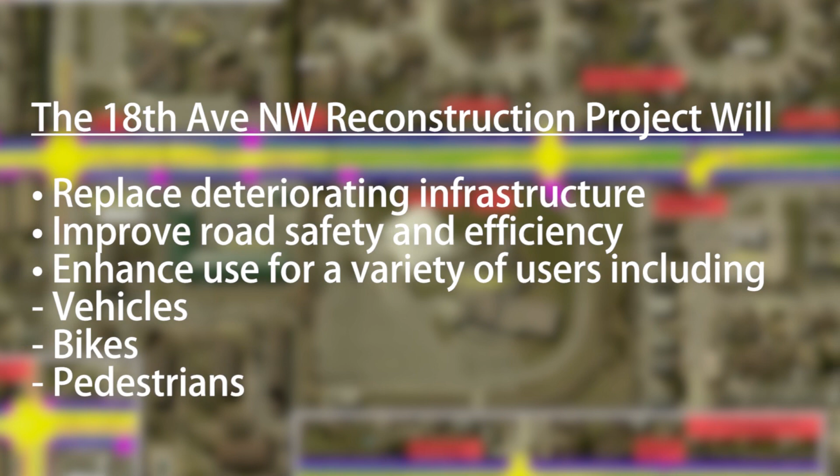What exactly will be done? The City of Rochester and Olmsted County have partnered and secured federal transportation funding to pay for a portion of the project. The proposed project will reconstruct 18th Avenue Northwest from 37th Street Northwest to 55th Street Northwest.

The project is expected to begin with utility work in the spring of 2017, continue with major construction in August of 2017, and conclude late in the fall of 2018.

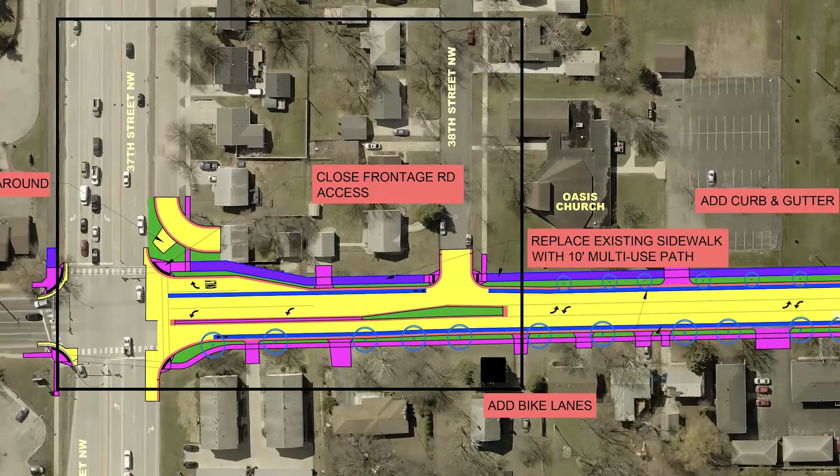Between 37th Street Northwest and 41st Street Northwest, the roadway will be reconstructed as a 3-lane roadway with a center left turn lane, on-road bike lanes, and a sidewalk on the east side, and a multi-use path on the west side. Between 37th Street Northwest and 38th Street Northwest, a center median will be added to help define the left turn lane, which will help address the current rear-end crash issue.

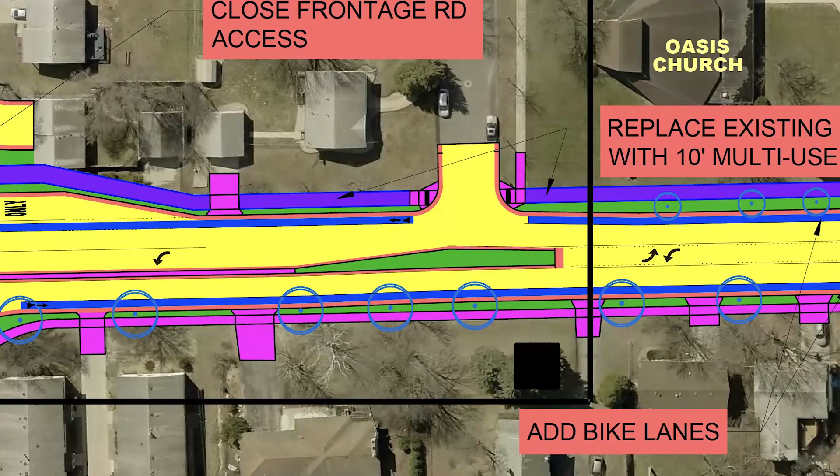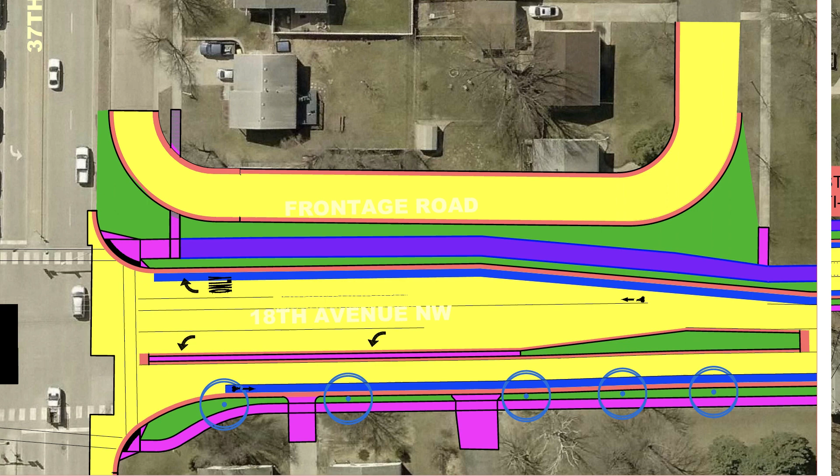Access to 38th Street Northwest will be limited to right-in, right-out access with no left turns allowed. The current 37th Street Northwest frontage road access to 18th Avenue Northwest will be replaced with a 3-point turnaround area. Future improvements may include the extension of the frontage road to connect with 38th Street Northwest and the elimination of the 38th Street Northwest intersection with 18th Avenue Northwest. In addition, pedestrian curb ramp and signal improvements will be made at the 37th Street Northwest intersection.

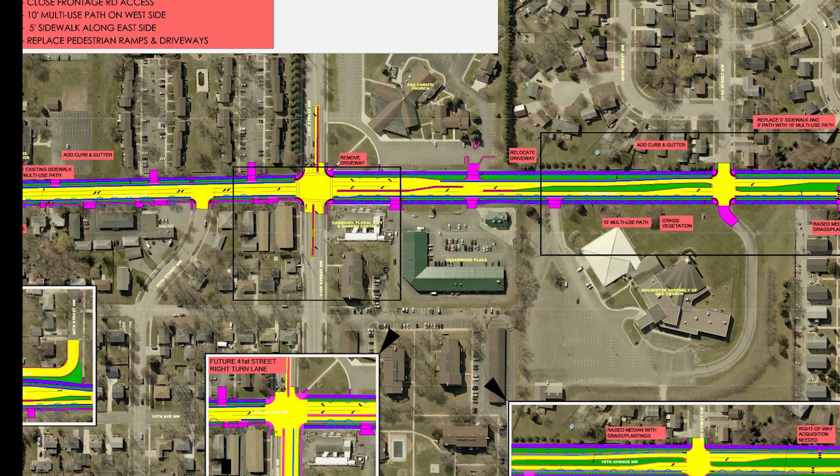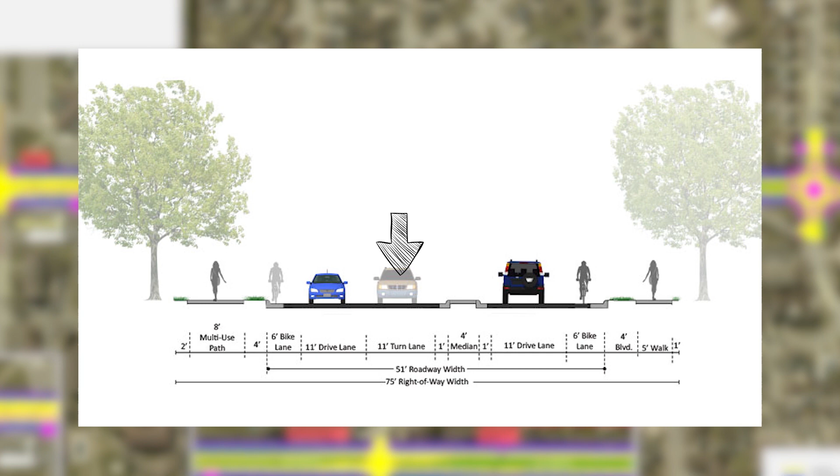Between 41st Street Northwest and 55th Street Northwest, ditches will be removed and the roadway will be reconstructed into a 2-lane urban roadway with curb and gutter, landscaped center medians, left turn lanes, on-road bike lanes, and multi-use paths on both sides of the roadway.

At 41st Street Northwest, center medians will be added to better define the left turn lanes. Signal and pedestrian curb ramp improvements will also be added. Changes to 18th Avenue access will be made at the Cedarwood Plaza and Pax Christi Church.

The South 18th Avenue entrance to Pax Christi will be eliminated, and the South Cedarwood Plaza entrance will be limited to right-in, right-out only by the center median. The north entrance to Pax Christi will be relocated to better align with the Cedarwood Plaza access across the street. This north access will allow all turning movements with left turn lanes provided.

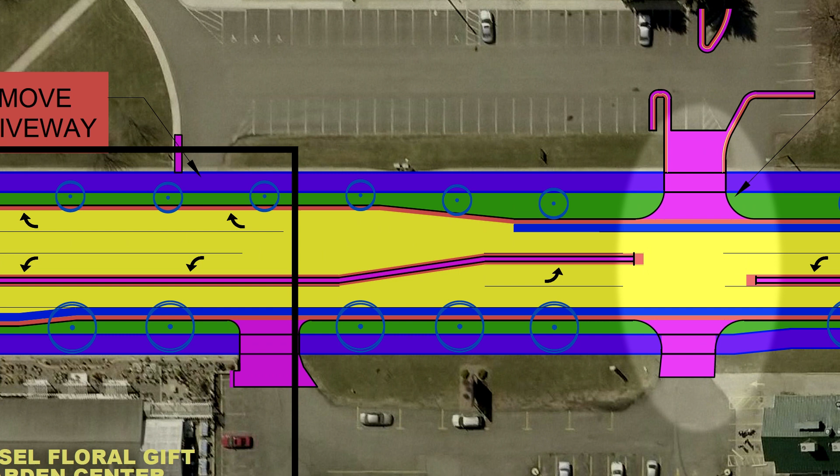The intersection at 43rd Street Northwest will be constructed as a full-access intersection with left turn lanes. At 45th Street Northwest, left turns will be allowed only for southbound traffic.

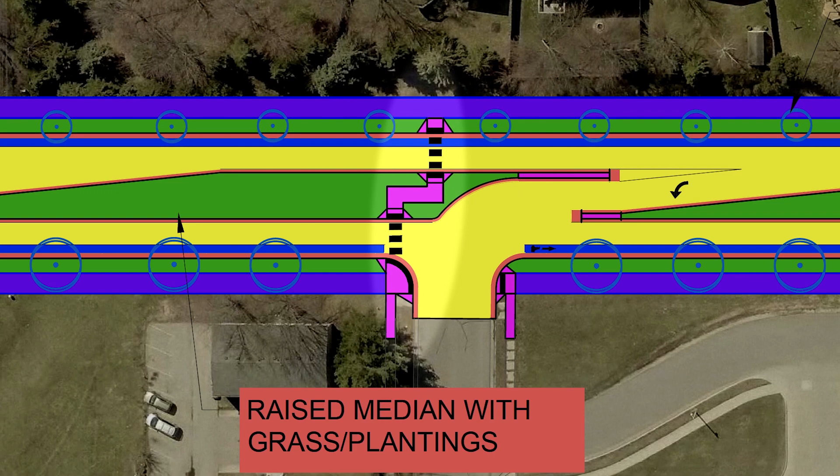In addition, an enhanced pedestrian crossing will be added, including a center median acting as a pedestrian refuge. The sidewalk in the center median includes a jog to allow pedestrians a better view of oncoming traffic prior to crossing. A future improvement to the 43rd and 45th Street Northwest intersections may include closure of the 45th Street Northwest intersection and extension of Service Drive to the south to connect with 43rd Street Northwest.

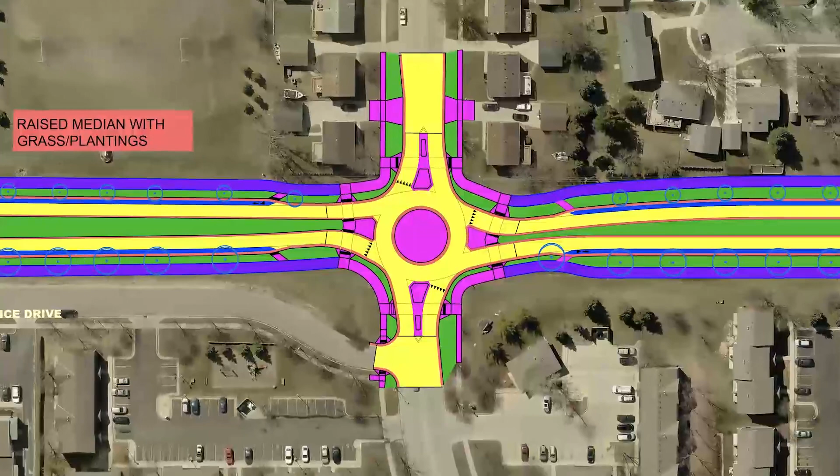At 48th Street Northwest, a mini roundabout will be added. Mini roundabouts allow full access to all turning movements while providing added safety benefits, including reduced speeds and shallow entry angles that reduce crash severity. These benefits result in reduced crash rates at mini roundabout intersections when compared to other intersection control types.

Later in this video, we will learn how mini roundabouts function and how they are different than larger roundabouts that have been constructed elsewhere in Rochester.

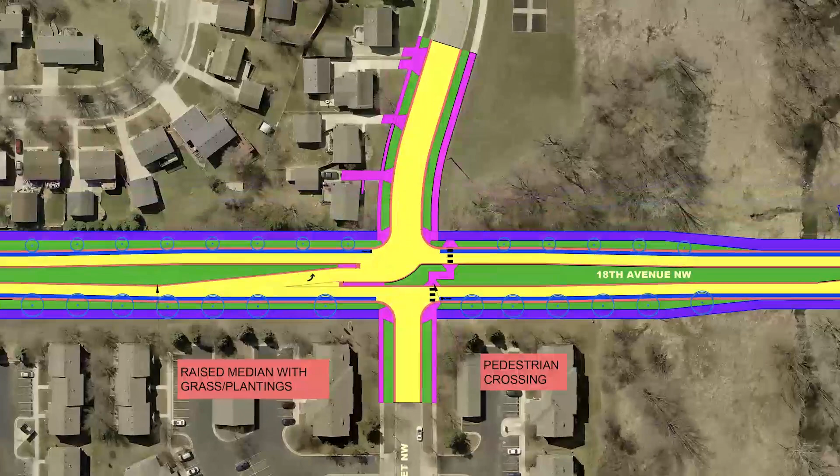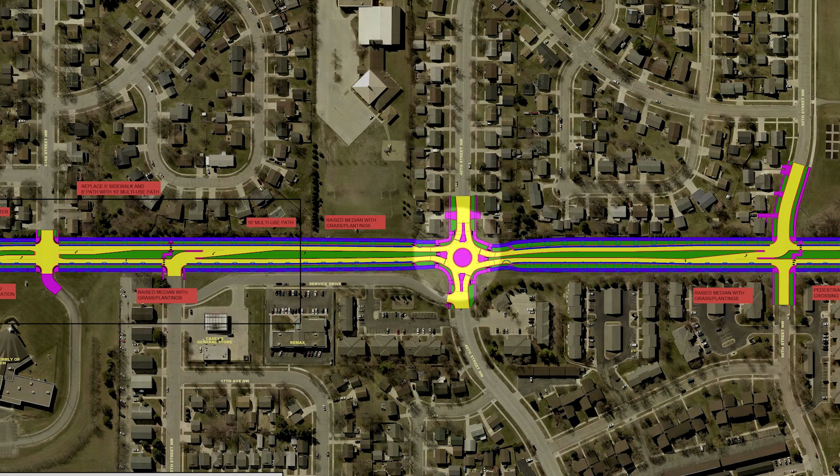At 50th Street Northwest, left turns will be allowed only for northbound traffic. This intersection will also include an enhanced pedestrian crossing similar to the 45th Street Northwest intersection. With combined improvements of the 43rd, 45th, 48th, and 50th Street intersections, there will be full access to neighborhoods along 18th Avenue. The mini roundabout at 48th Street Northwest will serve as the primary crossing of 18th Avenue Northwest. Northbound travelers along 18th Avenue will be able to turn east at 45th, 48th, and 50th Street Northwest, and west at 43rd, 48th, and 50th Street Northwest.

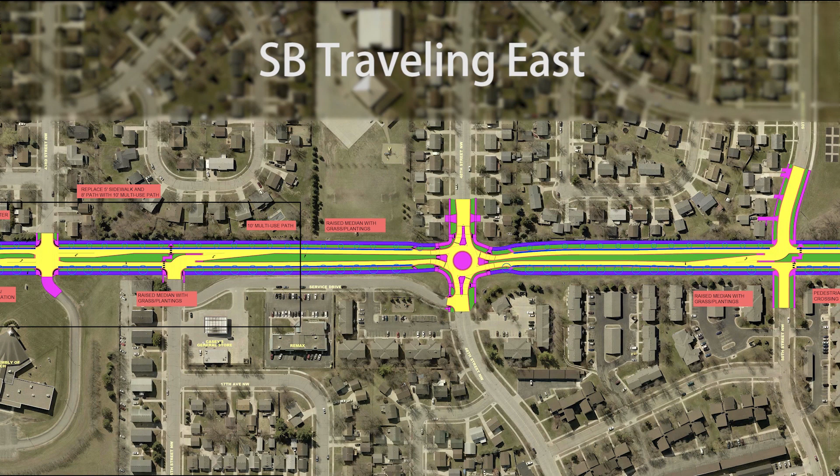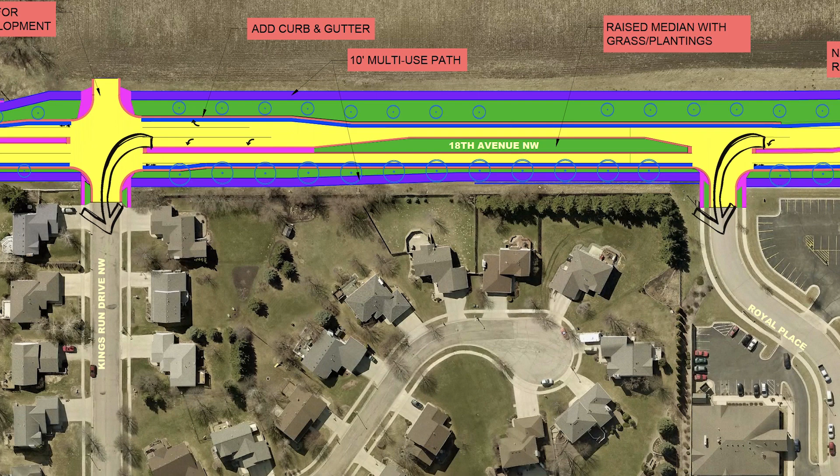Southbound travelers will be able to turn east at 48th and at 45th Street Northwest, and west at 50th, 48th, and 43rd Street Northwest. The Kings Run Drive and Royal Place intersections will be constructed as full-access intersections with left turn lanes and a right turn lane at Kings Run for future development.

Pedestrian ramps and signal improvements will be made at 55th Street Northwest.

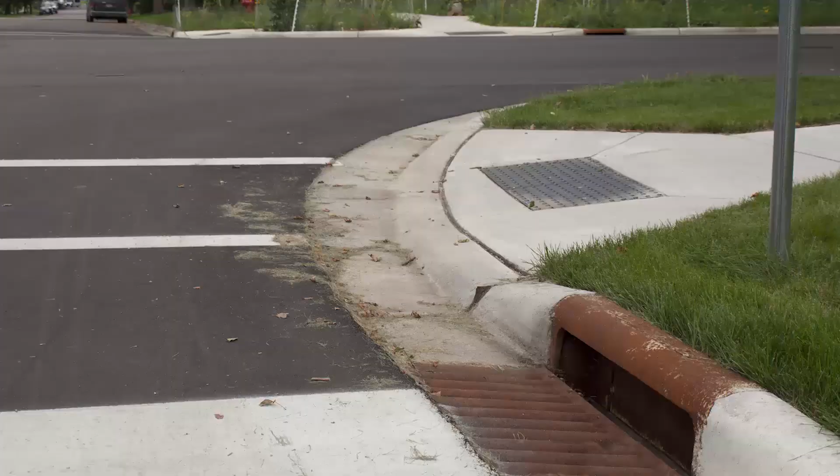Grass boulevards and multi-use trails will replace the drainage ditches along the roadway. Catch basins and storm sewers will catch runoff. Rain gardens at selected locations will provide stormwater treatment. Other landscaping, including median plantings and boulevard trees, will also be installed along the corridor.

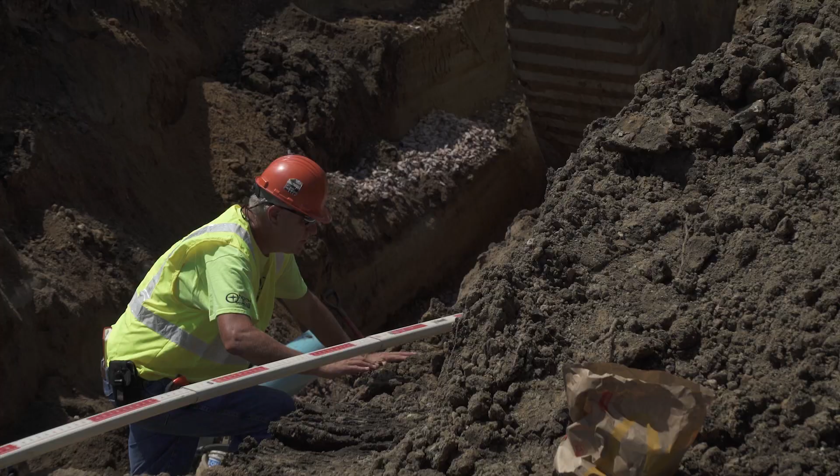Along the entire corridor, selected replacement of sanitary sewer and water main utilities will be made. In addition, relocation and replacement of other utilities will be completed both prior to and during the project. These relocations will include power poles, street lighting, natural gas, and communication lines.

How will it affect me? Utility relocations for the project are expected to begin in the spring of 2017, with major construction planned to begin in August of 2017. The project is expected to take place over two construction seasons, completed and open to traffic in late fall of 2018. The project will be constructed in four phases.

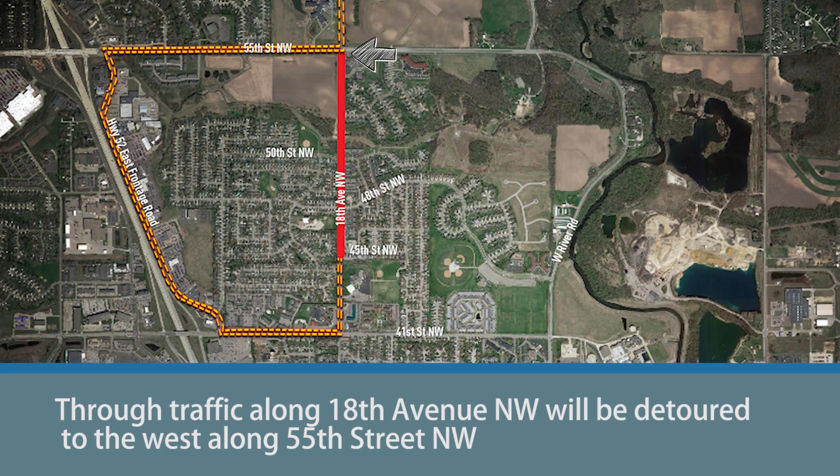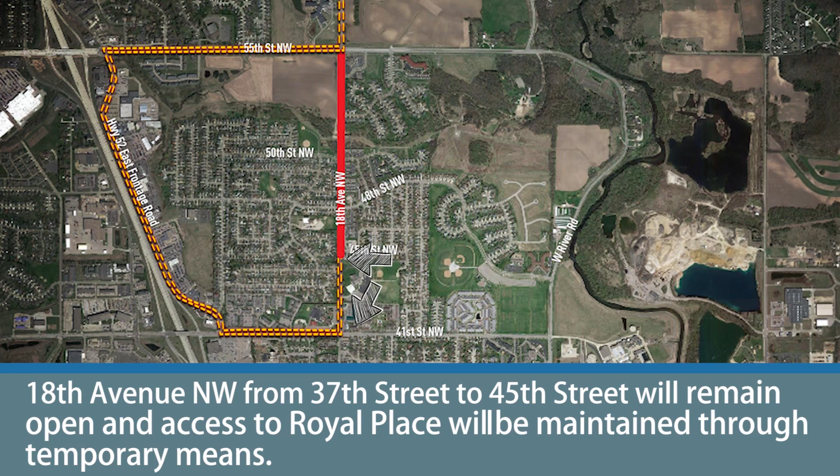Phase 1 includes 55th Street Northwest to the north side of the 45th Street Northwest intersection. During Phase 1, through traffic along 18th Avenue Northwest will be detoured to the west along 55th Street Northwest and 41st Street Northwest to the Highway 52 East frontage road. 18th Avenue Northwest from 37th Street to 45th Street will remain open, and access to Royal Place will be maintained through temporary means. Access to Kings Run Drive will only be available from 55th Street Northwest.

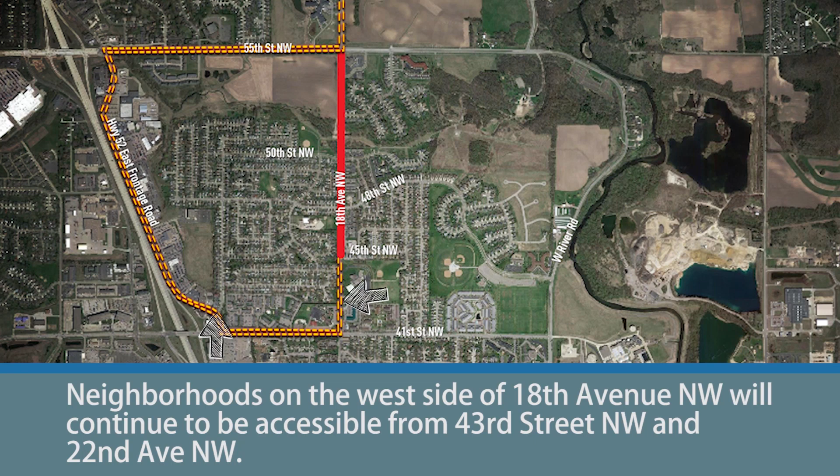Neighborhoods and businesses on the east side of 18th Avenue Northwest will be accessible from 45th Street Northwest and Service Drive. Neighborhoods on the west side of 18th Avenue Northwest will continue to be accessible from 43rd Street Northwest and 22nd Avenue Northwest. Construction for phases 2 through 4 is planned to resume in spring 2018 and is expected to be completed in late fall of 2018.

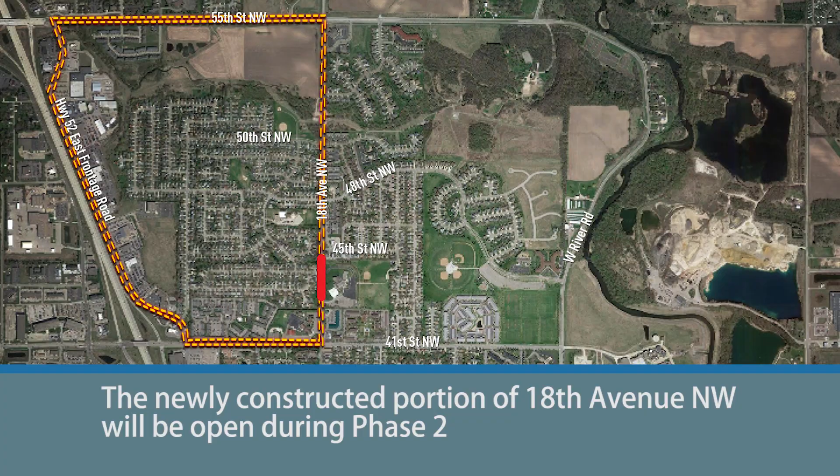Phase 2 includes the north side of 45th Street Northwest to the north side of the South Assembly of God Church entrance. The newly constructed portion of 18th Avenue Northwest will be open during Phase 2 and will provide access to neighborhoods and businesses east and west of 18th Avenue Northwest at 48th, 50th, Kings Run Drive, and Royal Place. Traffic will continue to be detoured along the Highway 52 East frontage road. The portions of 18th Avenue Northwest from the church entrance to the south will remain open.

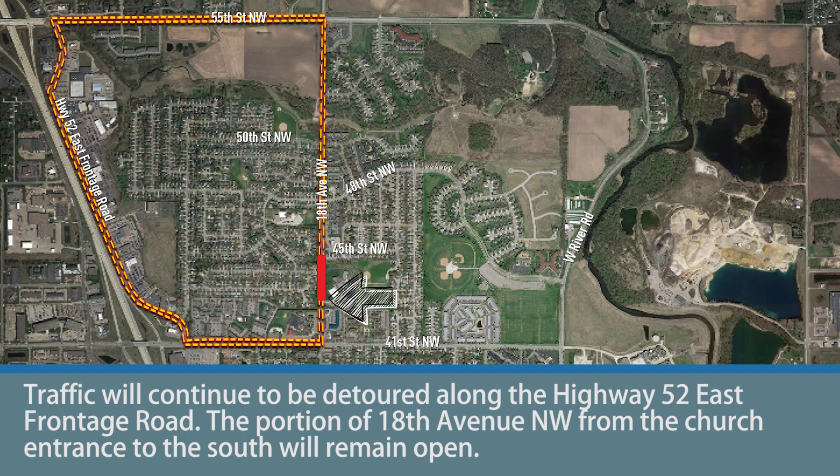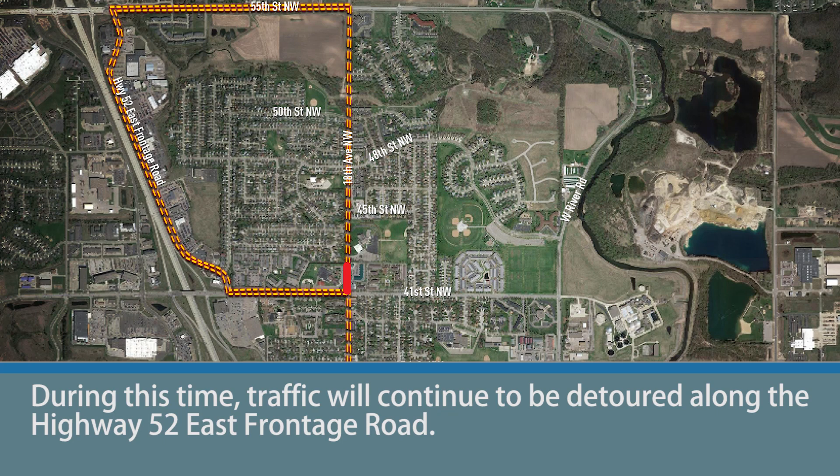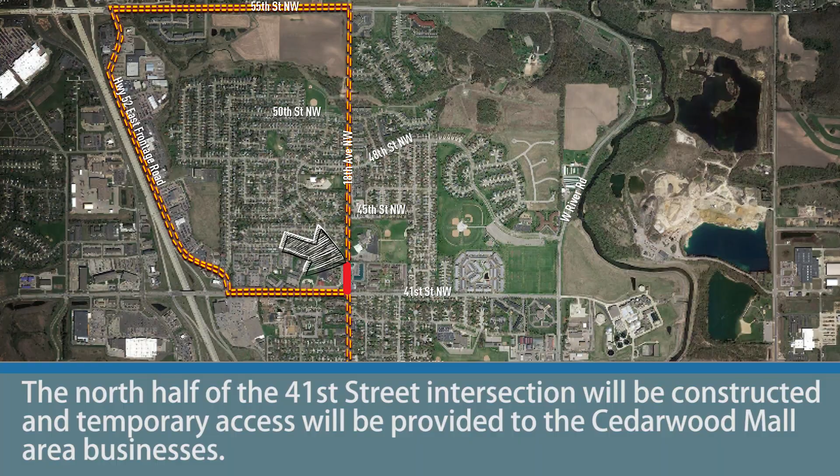Phase 3 includes the north side of the South Assembly of God Church entrance to 41st Street Northwest. During this time, traffic will continue to be detoured along the Highway 52 East frontage road. The north half of the 41st Street intersection will be constructed, and temporary access will be provided to the Cedarwood Mall area businesses. Phase 4 includes 37th Street Northwest to 41st Street Northwest.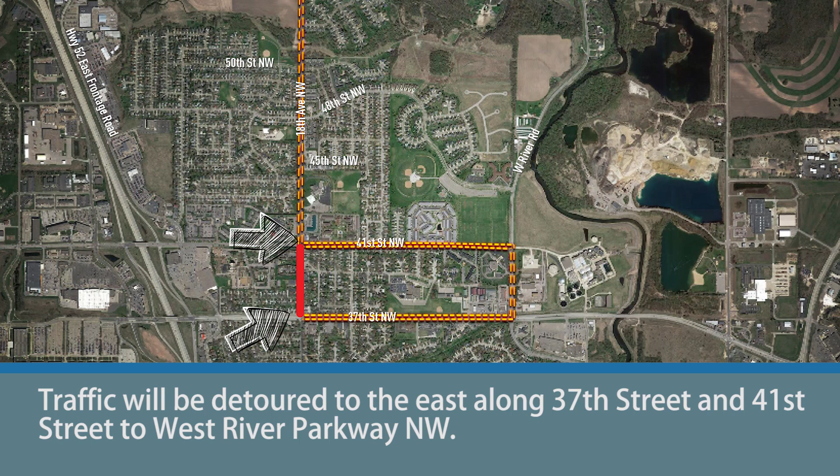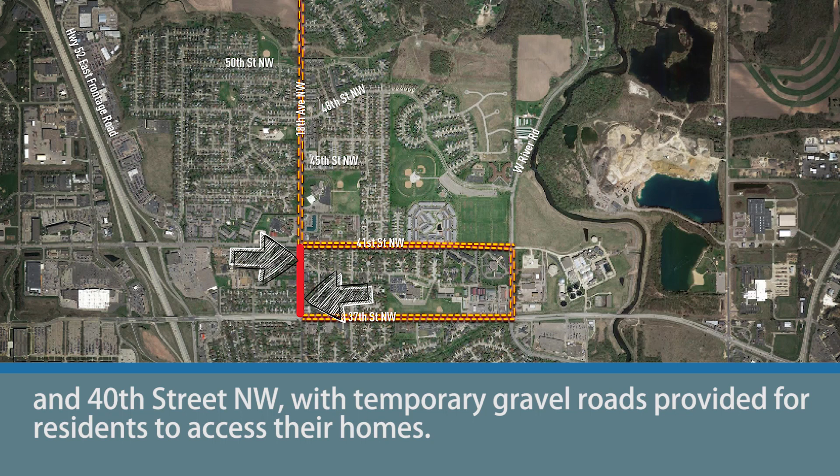During this phase, traffic will be detoured to the east along 37th Street and 41st Street to West River Parkway Northwest. The south half of the intersection of 41st Street Northwest will be constructed, and access for local traffic will be provided from 38th Street Northwest and 40th Street Northwest, with temporary gravel roads provided for residents to access their homes. There will be short periods during this phase when residents will not be able to access their driveways and will need to park on side streets.

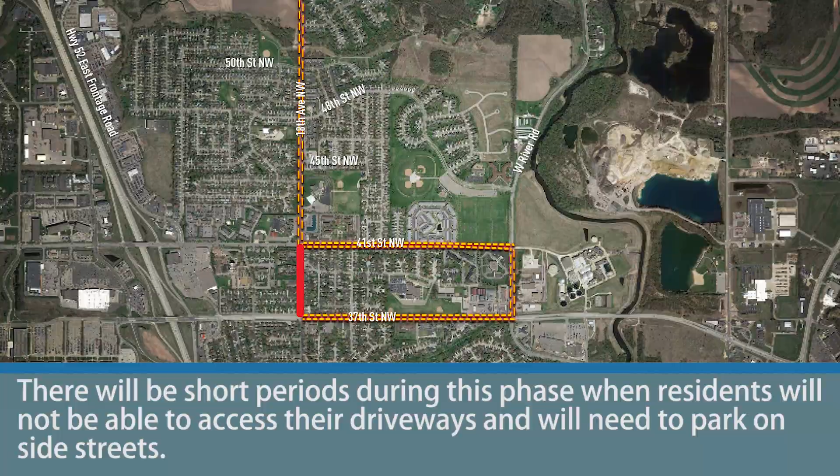During all phases of construction, directional signage to local businesses will be provided. By late fall 2018, construction is expected to be completed and the roadway completely open to traffic, including Rochester's first mini roundabout at 48th Street Northwest.

A mini roundabout is a type of intersection that can be used in constrained locations in place of a stop sign or signalized intersection to help improve safety and reduce delays. Mini roundabouts generally have a footprint small enough to stay within the existing intersection.

The primary difference between a regular roundabout and a mini roundabout is the lack of a raised landscape center island. The center of a mini roundabout will be painted or slightly raised and is meant to be driven over by large trucks, buses, and emergency vehicles. All other vehicles should follow the striping and arrows painted on the roadway and travel counterclockwise around the center island.

Mini roundabouts follow many of the same rules as larger roundabouts: stop for pedestrians, yield to traffic already in the roundabout, and drive in a counterclockwise direction. As you approach the roundabout, slow down, assess the situation, and look for pedestrians. Always stop for pedestrians in the crosswalk.

Look to your left, yield to vehicles in the roundabout. They have the right of way. Before pulling out, check the flow of traffic. Know what is ahead of you to avoid a rear-end collision.

Although the next two years of construction will be difficult and challenging, the project will address aging infrastructure and improve safety and mobility along the corridor for all users. The City of Rochester and Olmsted County thank you for your patience during this construction effort to help make Rochester a better place to live.